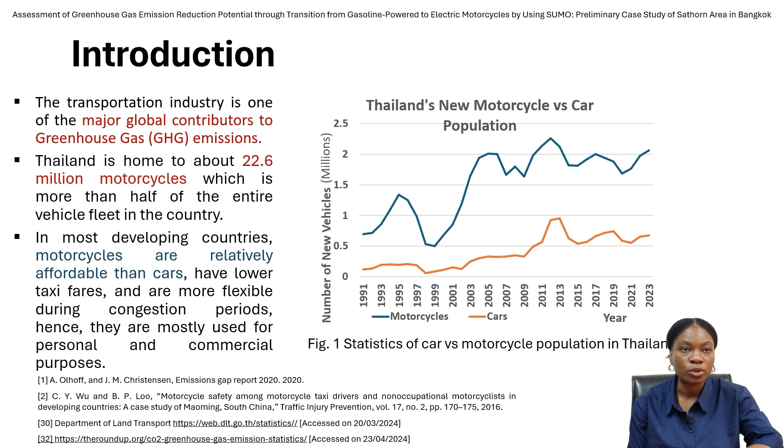Because of the urgent need to reduce greenhouse gas and other road transport emissions and their adverse effect on the environment, this research is geared towards increasing sustainability and providing clean energy in the transport sector through the adoption of electric motorcycles. This research will contribute to the gap by quantifying the potential decrements in the greenhouse gas emission, which can be achieved by transitioning from gasoline-powered motorcycles to electric motorcycles. And this is a practical case study on the urban congested area in Thailand.

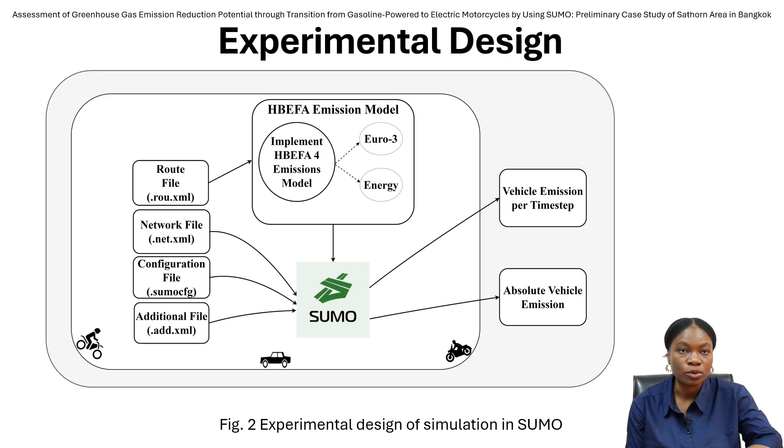Talking about the HBEFA emission model and the emission standards, the HBEFA is the basis used for calculating road traffic emissions, and this model has detailed emission factors for various pollutants emitted by different types of vehicles under the different traffic scenarios. This defines the emission factors for a wide range of vehicle classifications for the fuel types, the technological standards used for the vehicles, and is especially notable for having the capacity to compute for the entire vehicle fleet, not just for an individual vehicle.

The emission standards are a set of rules that govern and limit the pollutant emission for the vehicle to improve air quality. The standards are categorized for motorcycles Euro 1 up to Euro 5, while for the cars we have Euro 1 up to Euro 6, and the standards are continually being updated over time to be stricter, especially for carbon monoxide, hydrocarbon, particulate matter, and nitrogen oxide.

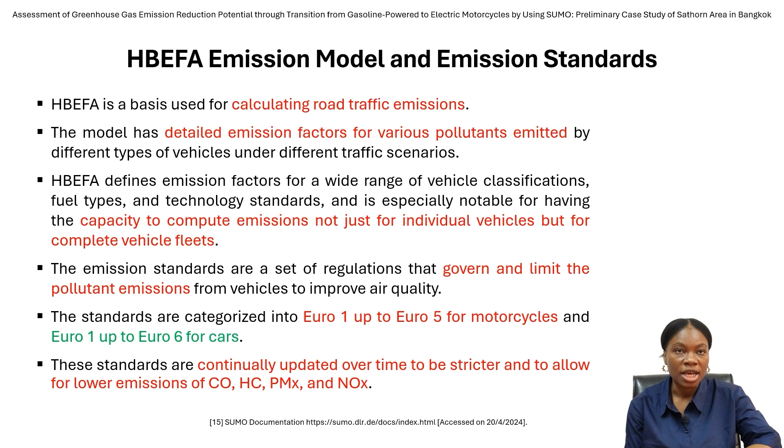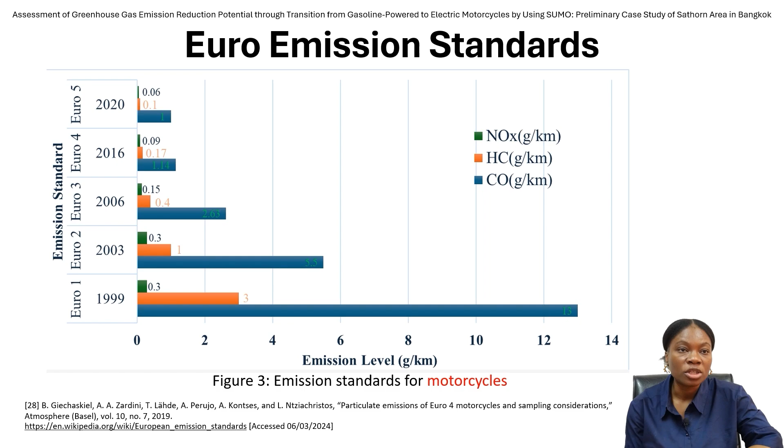So why SUMO? Because SUMO is an open source, portable and microscopic traffic simulator, which is mainly used for handling mobilities in road network simulation. In previous work done by our team, SUMO has been calibrated with the actual traffic data measurements to emulate the real-life traffic situations of the Sathorn road network area. And this allows us to use the output directly to evaluate realistic greenhouse emissions.

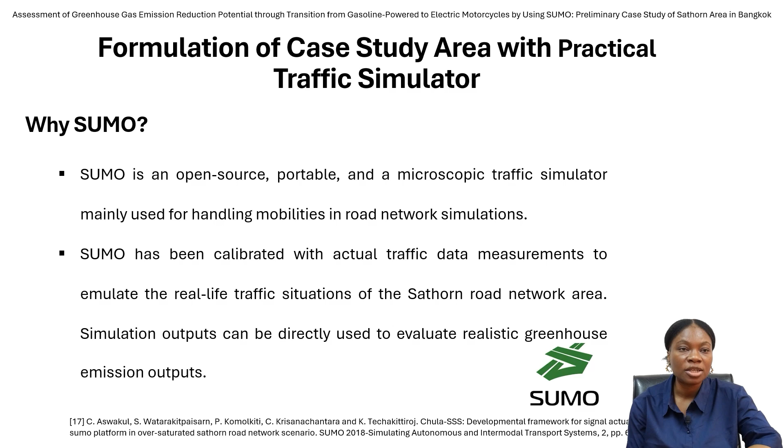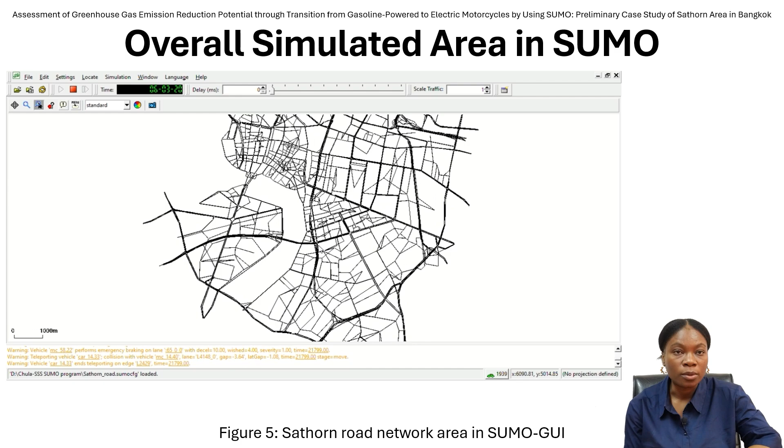So this shows the overall simulated area of the Sathorn road network area, where we have input the cars and the motorcycles.

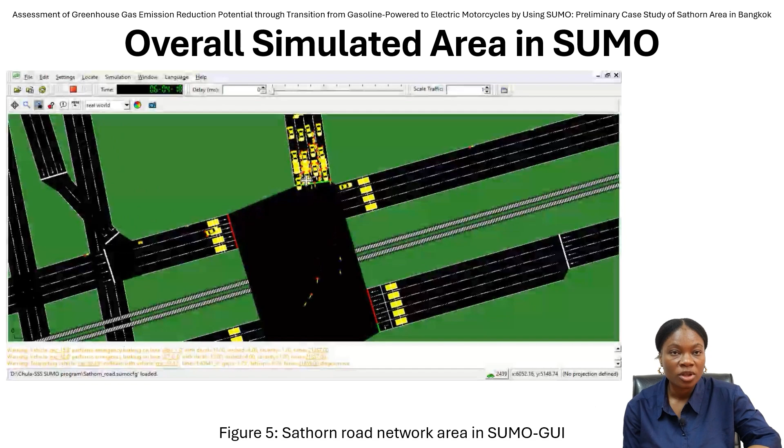This shows the movement in the SUMO platform that was used in this research. We can see the vehicles moving as per the route set in the simulation file. This allows us to see that the vehicles indeed emulate real-life situations, where the motorcycles are able to move in between cars during the traffic period and come to the front of the stop line, just as we would have it in a real-life traffic situation. So this further validates our data and lets us know that it is indeed emulating the real-life traffic scenario.

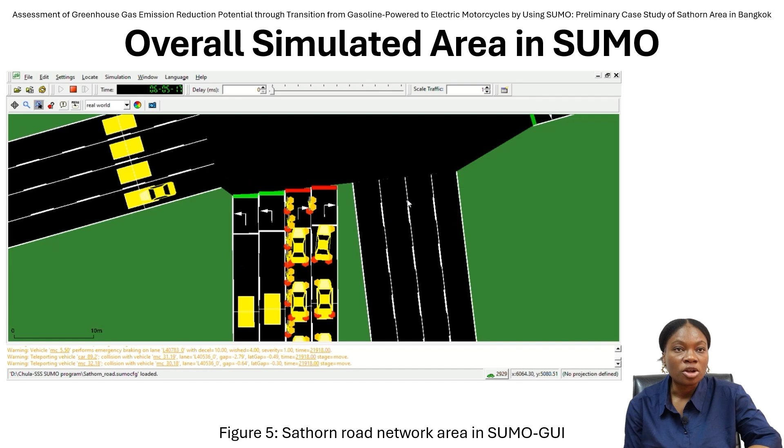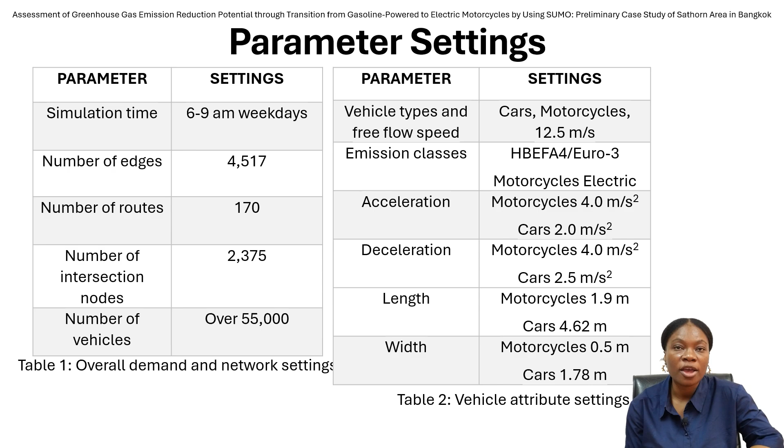So this table shows the parameter settings for the overall demand and network settings, while this shows the vehicle attributes. We have the network settings for the whole network area and the vehicle attribute settings for each of the vehicles in the simulation, namely cars and motorcycles.

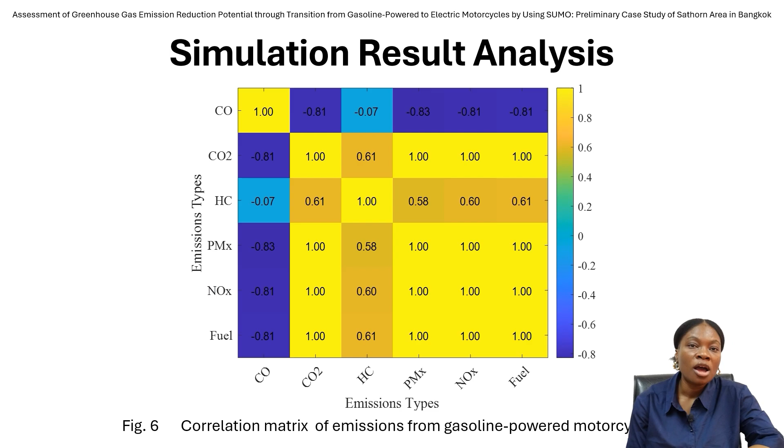Discussing the simulation results, this correlation matrix shows the relationships and interdependencies of the emissions with themselves and with other emissions and fuel. Worthy of note is the fact that fuel, as the common factor, shows a linear relationship with carbon dioxide, particulate matter, and nitrogen oxide.

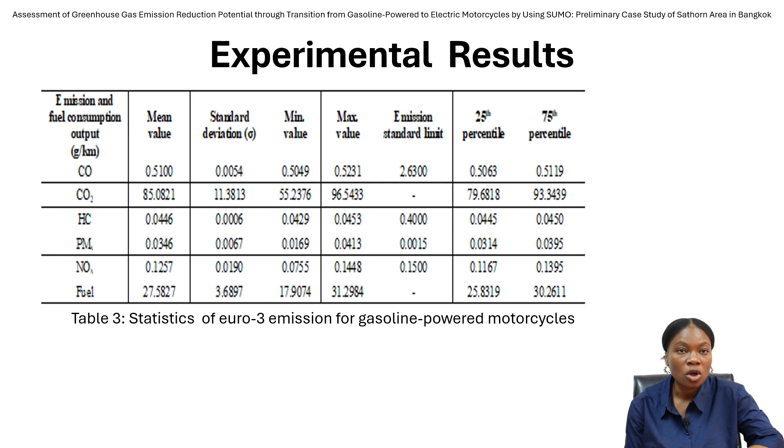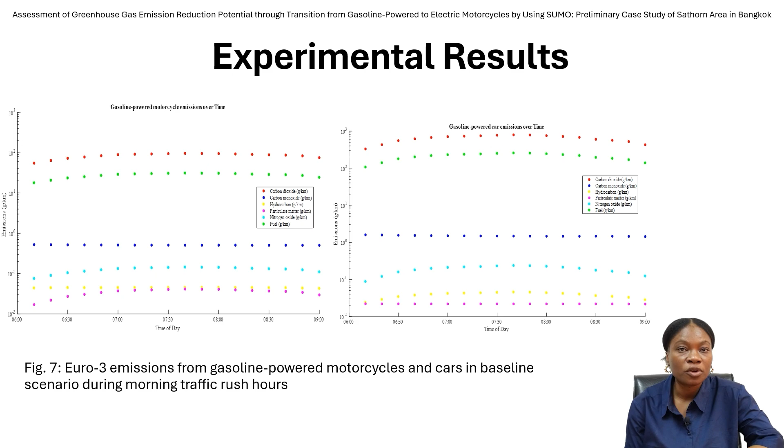The experimental result is shown in this table to let us know the limits and whether each of the outputs follows the emission standard that has been set for the cars and motorcycles. Experimental results: we can see the results for each of the emissions in this chart, where we have the Euro 3 emissions from the gasoline-powered motorcycles and cars for the baseline scenario during the traffic rush hour, for an average of each vehicle.

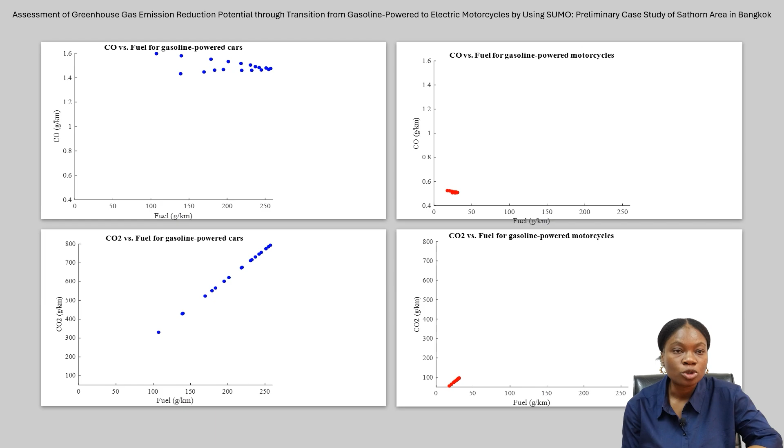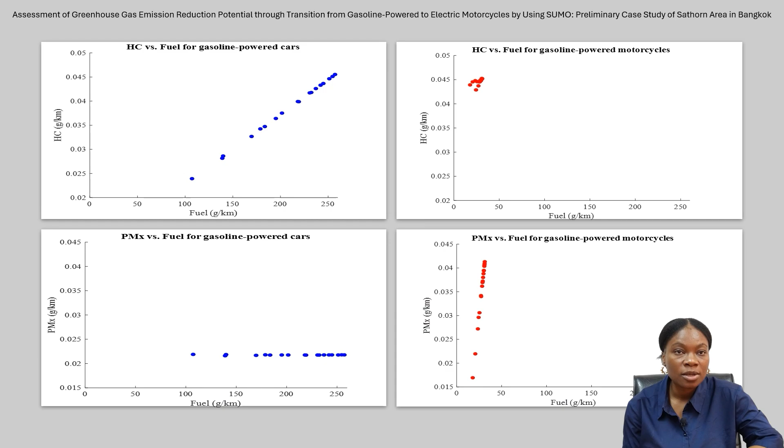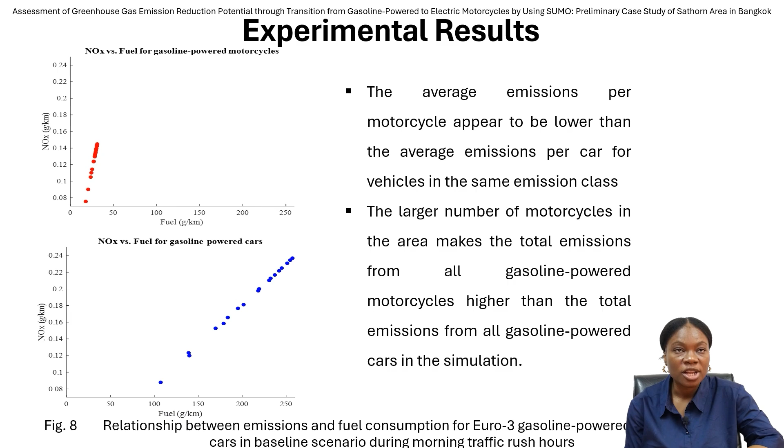Here we see the emissions of the cars and motorcycles against fuel to show the relationship for each of them. We have shown here that the emissions from the car, though they may seem higher than those of the motorcycle at first, because of the larger number of motorcycles in the area, the total from all the gasoline-powered motorcycles is way higher than the total emission from the gasoline-powered cars in the simulation. This further buttresses the point that we need to focus on motorcycles.

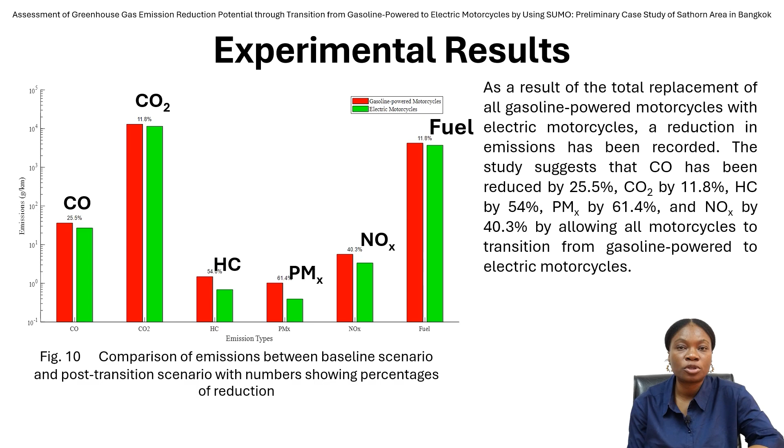In conclusion, the study provides a comprehensive analysis of the potential for greenhouse gas emissions to be reduced if we transition from gasoline-powered motorcycles to electric motorcycles. The findings indicate a significant reduction in emissions of carbon monoxide, carbon dioxide, hydrocarbon, particulate matter, nitrogen oxide, and in fuel consumption. The transition not only supports environmental sustainability but also enhances urban air quality, thereby promoting public health.